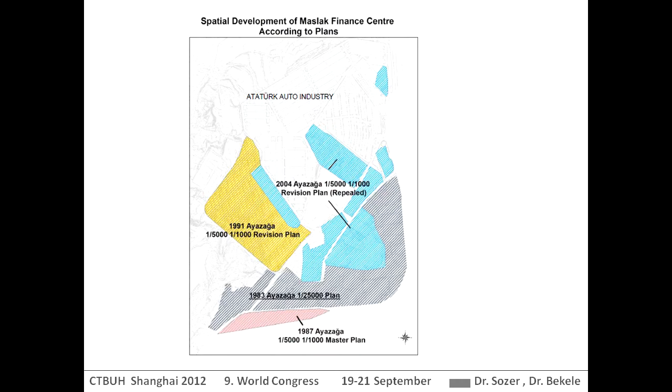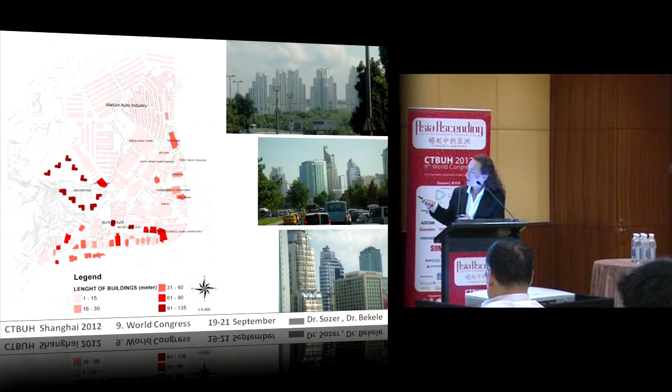And you see the master plan of the site that we have been working on. In the last 20 years, this master plan was revised almost 4 times because of the demand and growth of the city. Here you see the height of the buildings, and you see clearly that most of these buildings are office and mixed use, and these are the residential buildings that stand behind the highways. Especially on this site, they have more than 90 meters height.

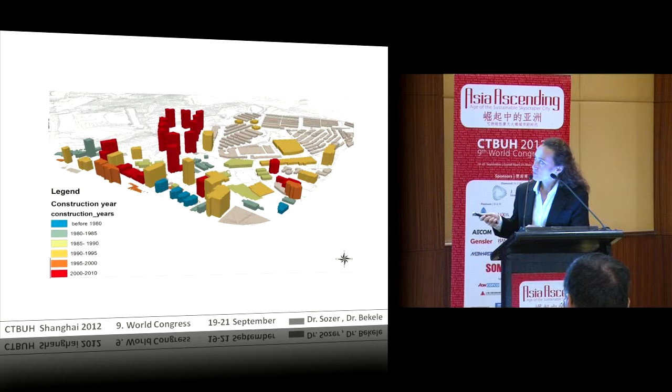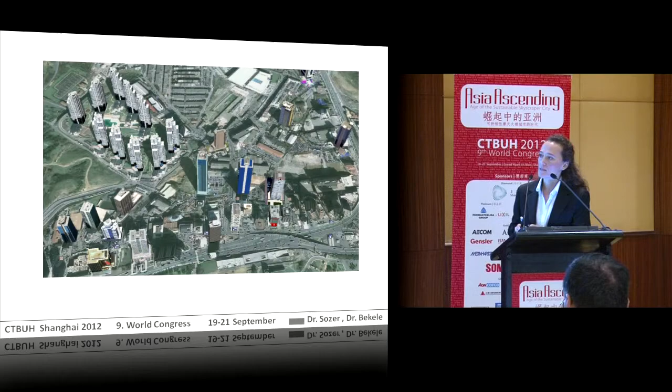And this is the legend of the years they were built, and you see that all the high-rises around it started being built after 2000. So these are the buildings on which we have done our study, and Dr. Seyfi Bekele is now going to show the measurements that he has done on this site.

Thank you. In the last 2 days in the Congress, we have seen how fast urbanization is growing in different parts of the world. And this urbanization involves high-rise buildings. The reason for high-rise buildings can be out of necessity, or it can be a sign of modernization. But whatever the reason for this urbanization, high-rise towers are going to affect the microclimate.

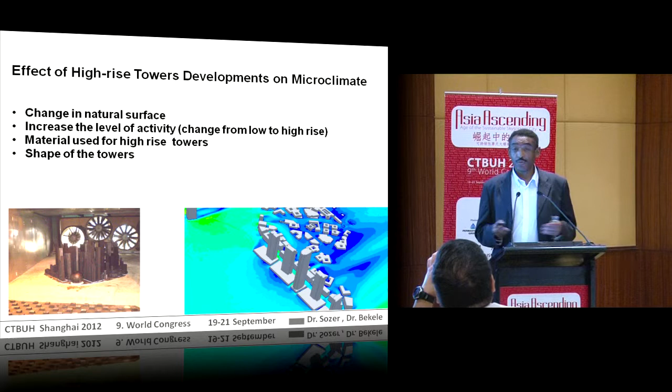This change in the microclimate involves, when we have high-rise towers, changing the nature of the surface. Before, it may have been only vegetation. Now we are going to have high-rise towers, or it can be low-rise towers. It also involves the material we are using, which also affects the microclimate, and the shape of the tower.

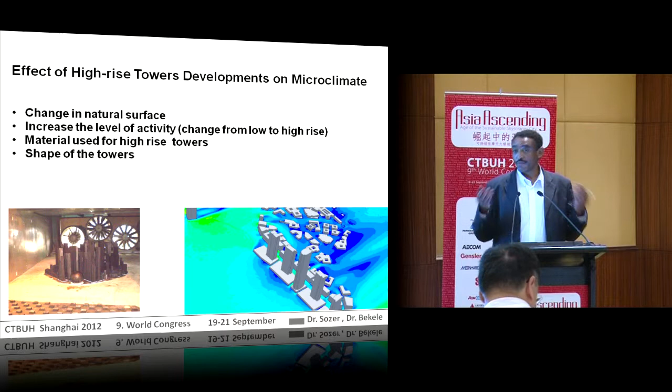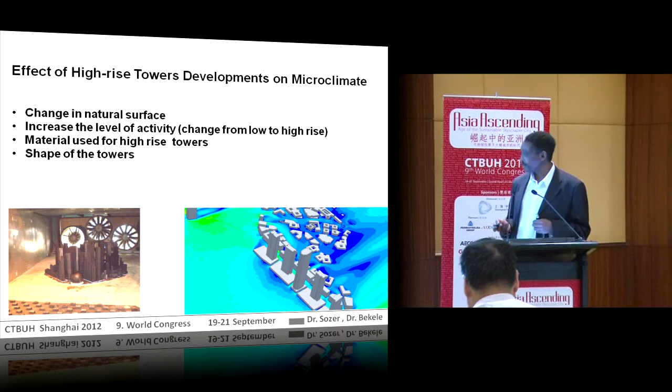There are different motivations when we are designing the shape of the towers, from the town planning aspect or from the individual tower aspect. We decide what kind of shapes we have to have. The density of the towers also plays a role. If it is too dense, then the wind can't penetrate through.

Also, we have to study the orientation. It's a very important aspect that the orientation of the towers or buildings with respect to the wind direction is important. The spacing between buildings plays an important role.

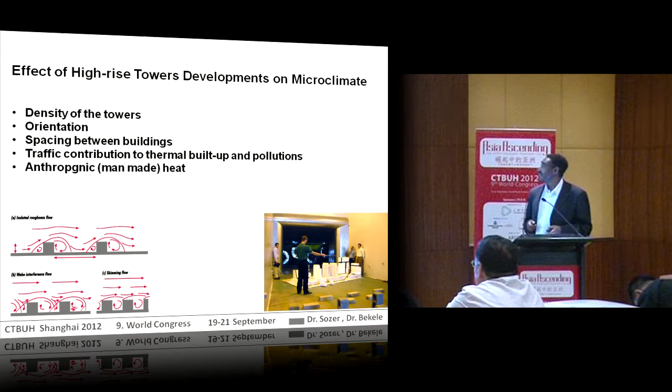When we are bringing a lot of people to one place, there will be traffic, and that will contribute to thermal build-up and pollution. There is also man-made heat. So all this adds up and is going to affect the microclimate of the surroundings.

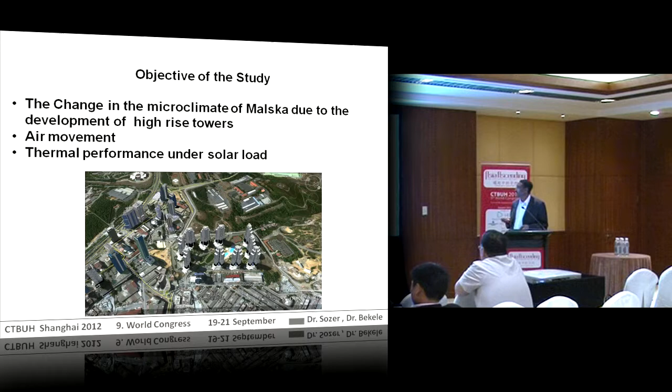Our objective is to study this area and find out the effects of these high-rise towers: first in terms of air movement, and then the thermal performance under the solar load. First, we have to look at the climate. The first important climate parameter we have to look at is temperature.

When we have high-rise towers, we are not going to have the same kind of temperature we had before. We know about the heat island effect. And when there is a change in temperature, we are going to affect the humidity too.

The wind speed profile over open land or a suburban region is different from that in a built-up city. What we expect at ground level is completely different. So we have to look at how the shape and density affect the wind speed, and the directionality too.

We may have a certain directionality from the meteorological station, but directly in the city it would be different from what's reported at the station. All of these climate parameters change in time, daily and monthly, which is important for the microclimate study. Their variation due to different directions is also important.

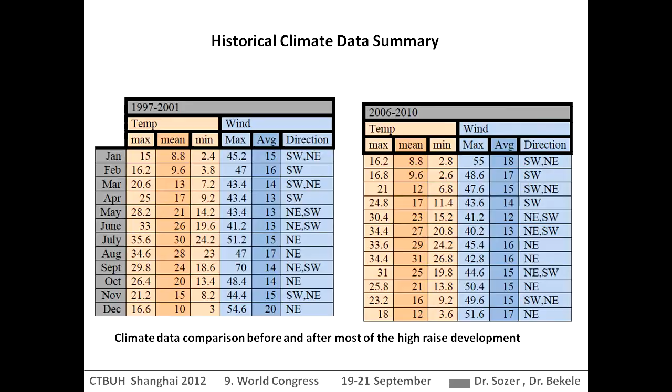For this study, we first looked at the climate before most of the high-rise developments were built, between 1997 and 2001, and after they were built, between 2006 and 2010. The data we have is from the airport, and because it's from the airport, it can't tell the whole story of what's happening in the city.

What we have seen is that in some months there is an increase in temperature, but in some months there is not. So even though we looked at the 5-year data before and after for every month, we can't be very conclusive because of the origin of the data.

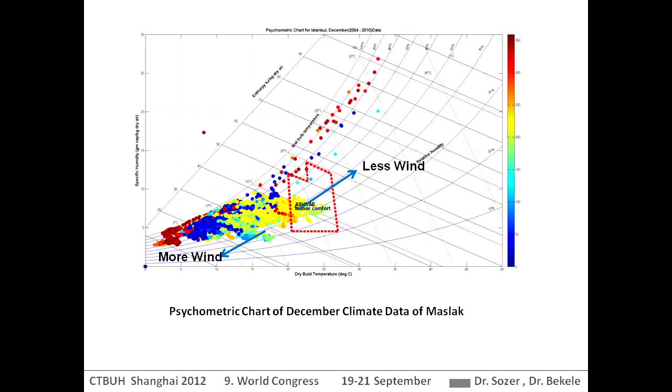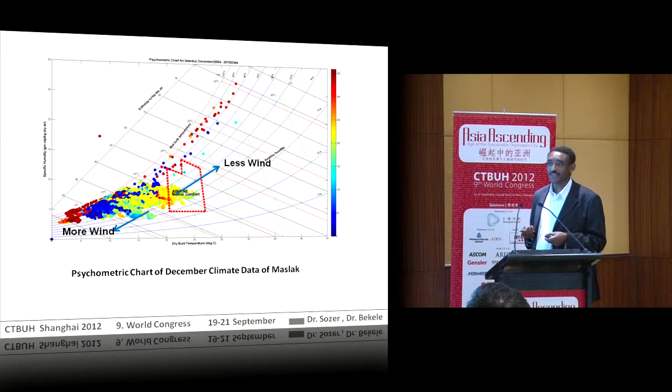What we can see is that as designers in the microclimate, what we want is to pull this farther up. That means we need less wind. If we have more wind, it feels really cold. So in terms of comfort, in winter, we don't want to have wind in outside areas unless for pollution dispersion.

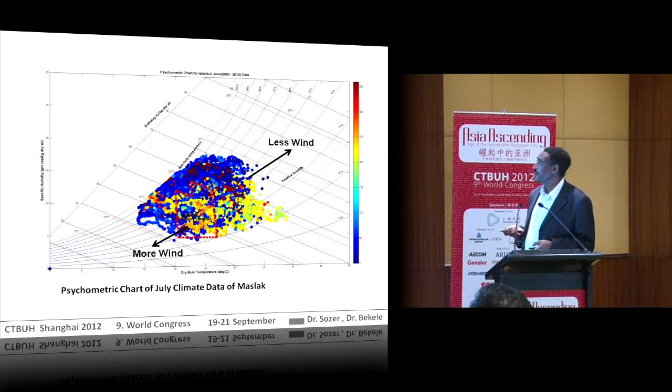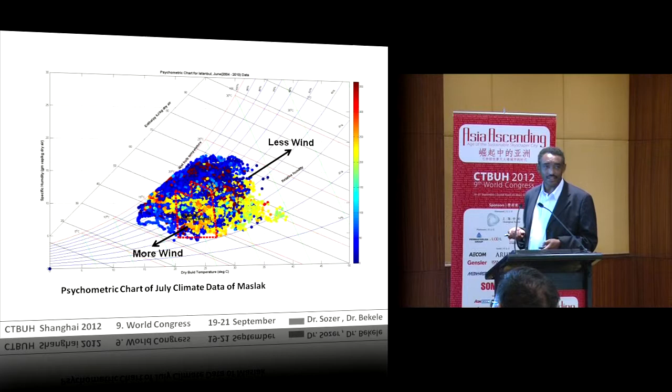When we look at the June data and plot it in the psychrometric chart, we see that it is almost comfortable, a little bit up. And here it's also the same thing. Less wind pulls it higher, and if we have more wind, it pulls it down. That means in the summer, we want to have more wind, to push it to more comfort. So this tells us how the regional wind looks.

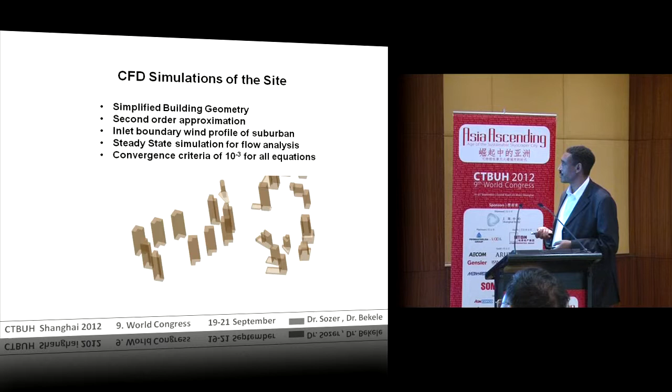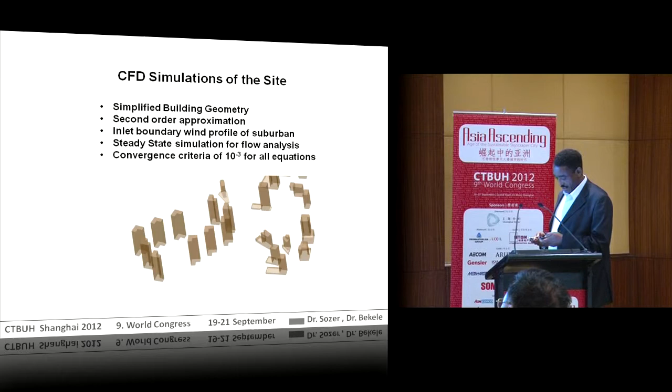Then we used CFD simulation to find out. This is the setup we have, a simplified building geometry. We used a second order approximation, and an inlet boundary condition, like the wind approaching from a suburban one. From this simulation, we found that the wind coming from the northeast is accelerating between the buildings, and there are some low wind speed regions. There are a few high-rise buildings, but we ignored those; these are low-rise buildings.

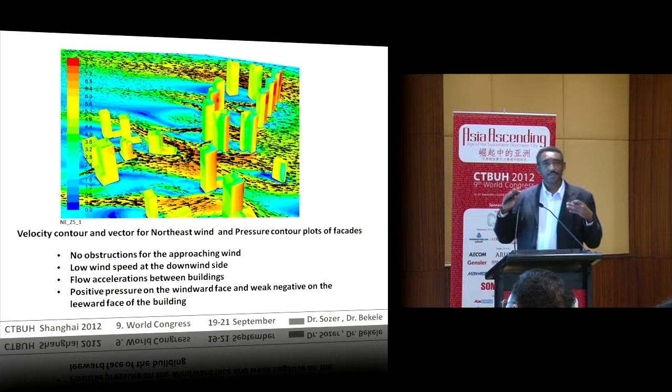And when we are plotting here, we also plotted the pressure on the building's faces. From a natural ventilation point of view, how the pressure is distributed around the buildings is very important. When the wind is blowing from here, that is a positive region, and we want to have the negative at the back. And how strong we can have it is also a function of the shape of the building.

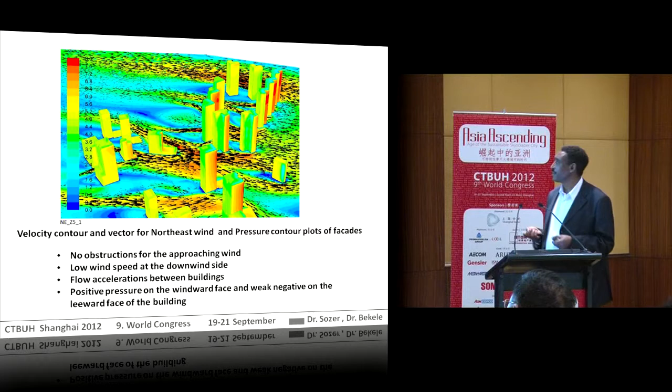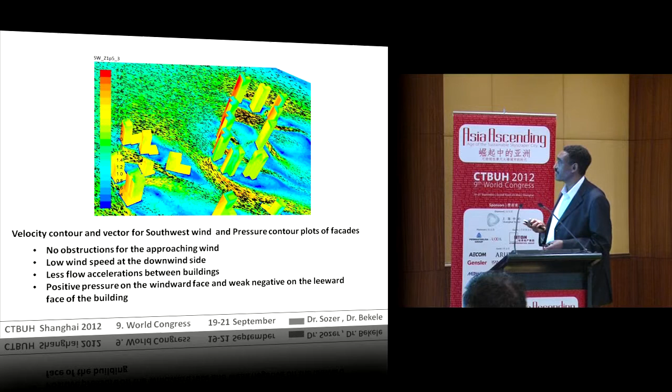And we looked at the southwest wind, and the same thing. This is plotted on pressure. We have positive pressure, the red one, and at the back is negative. And we can see high wind, which is due to channeling, and there are some low wind speed areas. What we thought is, okay, this is what I have. If I turn it around 180 degrees, how do some of the areas perform in accelerating the flow?

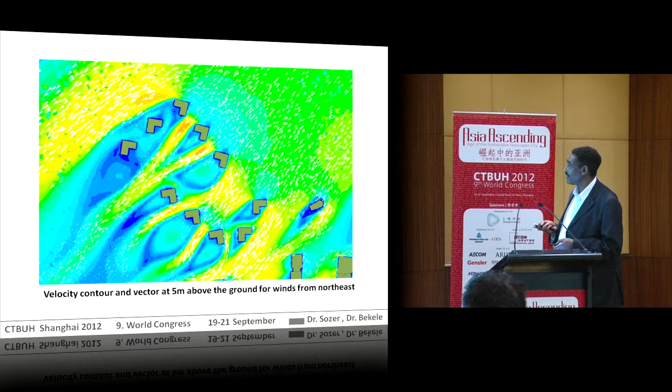We can see that there is a change in the wind speed in this area, especially if we look at them together before and after. In this area, this is how it is, and after it's different. So by changing the directionality, we can change the distribution of the wind.

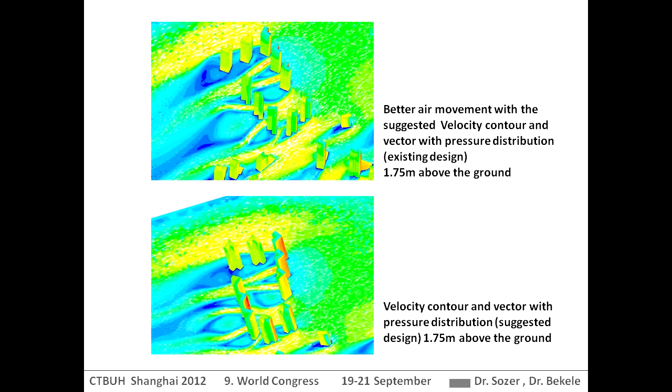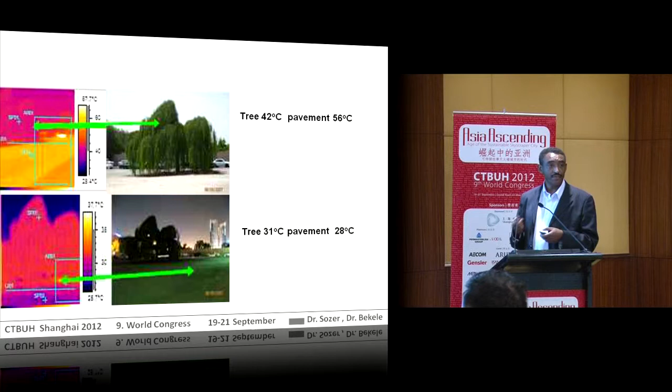The other thing which we have seen is that having a plantation will change. This is the measurement which we took for another project: we used a thermographic camera to see the difference between the tree and the pavement. When the tree is 42 degrees centigrade, the pavement was at 56. At night time, 31 and 28. So there is a big difference between the trees and the pavement. Having that means it encourages heat transfer.

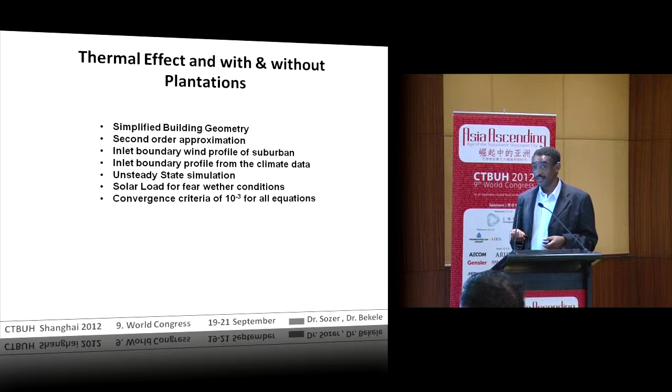So we went back and used CFD simulation. We used a simplified building geometry. In the previous one we used steady state, but in this one we used unsteady state, because we want to travel in time, we want to have a solar load, and see the effect of the solar load on the thermal performance.

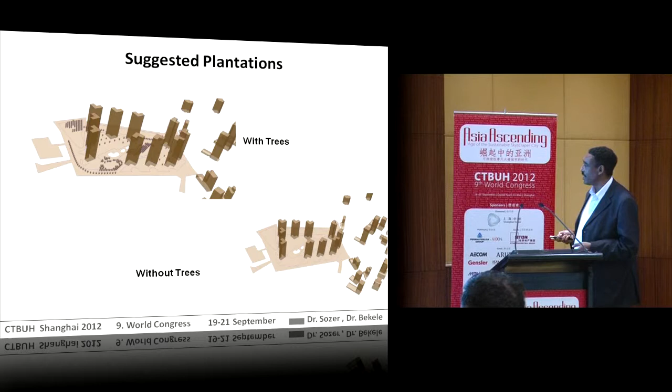So we have two configurations. One with the trees which we put in our simulation, and one without the trees. We specified the materials, concrete and glass, and the roads, which are asphalt, and grass, and for the other one we specified the same thing without trees.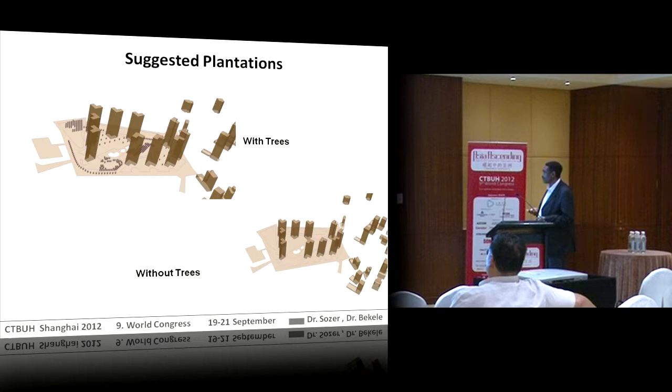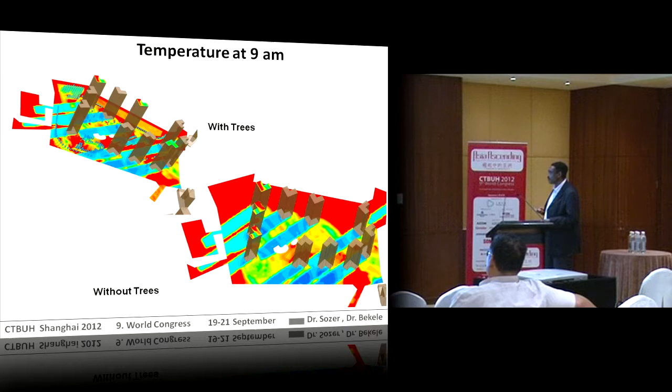Okay, the simulation temperature at 9 a.m. What we can see is that the red is very hot. This is without trees. This area is hot, but this is colder. This is because of the shade. So with the shading contribution, it is cooler in this area. And with trees, it's the same thing, actually. The main contributor in cooling down is the shading. And in this area, which is warmer, where we have trees, it's cooler.

When we have trees, it reduces the wind speed. In the first psychrometric chart I showed you, in some areas we want to increase the wind to have more ventilation. In some areas we want to decrease it. The way we design for different climates should be different.

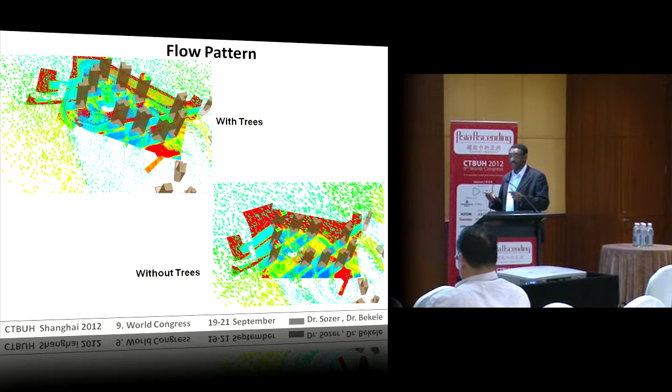When I'm designing for Hong Kong, my main aim is to have more wind to cool people down. But in this area, some heating is required. That means in the winter time, I want to have shielding, because the wind makes people really uncomfortable. So the trees in some areas here are necessary for stopping winter winds.

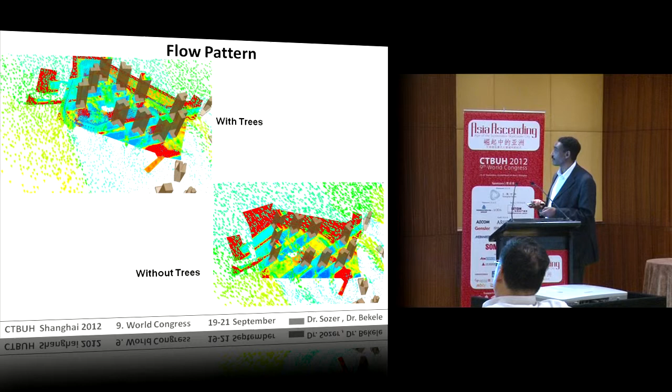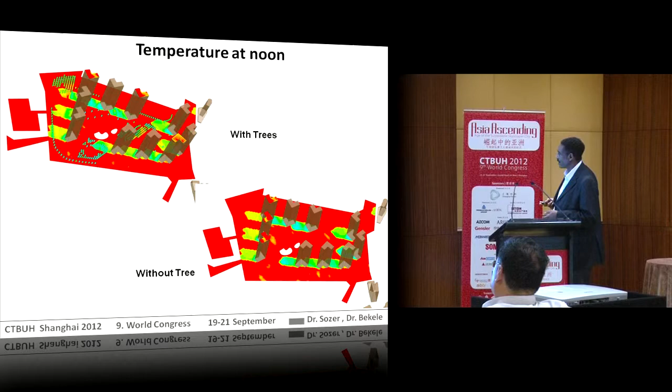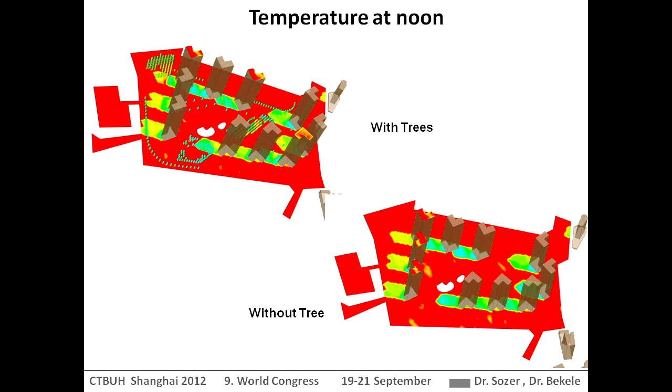In conclusion, we can say that having an effective design, with different shape and orientation, will improve the air movement. In this study, we found 10 to 15%. And consideration of the different angles also improves it, because of open space, 20 to 25%.

Using CFD is important for this study. Actually, in the first presentation, it was said the pedestrian wind is done in CFD. When you have unidirectionality, like north and southwest, it's easy to implement in CFD. But when you have a lot of directions, it's easier to do it in a wind tunnel than CFD, because there are a lot of things you have to change, and it's not as easy as it looks. Of course, there is development in computers, and to calculate the thermal effect, CFD is the only way. So it's an important tool for some of the things we are doing.

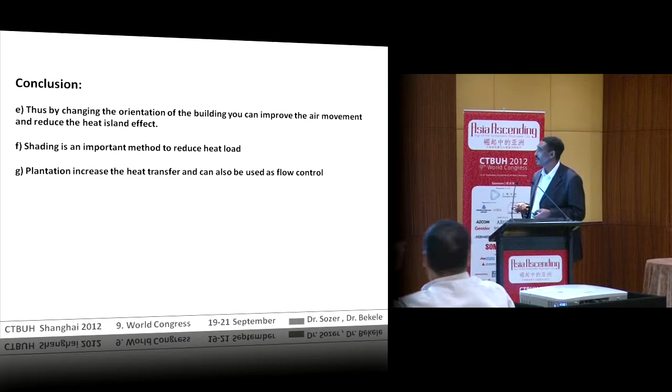So changing the orientation can improve the air movement. Shading is important, as you can see. Plantation increases the heat transfer and can be used for flow control.